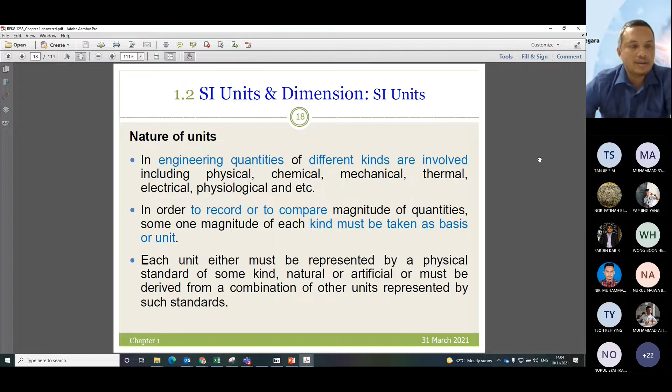In order to record or compare between each magnitude of the quantities, one magnitude needs to be taken as a basis, as a standard for the units. Each unit also must be represented by a physical standard of some kind, natural or artificial, which must be derived from the combination of other units, represented by the standards.

So SI unit stands for Systeme International d'Unites in French. This is from French words, and the abbreviation is adopted by the International Standardizing Organization, which is ISO, and it can be used in many languages.

I think all of you know about the ISO. ISO is a very important standard that needs to be followed by each country in order to have a good standard on the development and design of products.

The SI unit is comprehensive, a logical and coherent system designed for science, engineering, and technology. The SI unit system consists of 28 units, where there are 7 base units, 2 additional units, and 19 derived units. We can see what is the base unit.

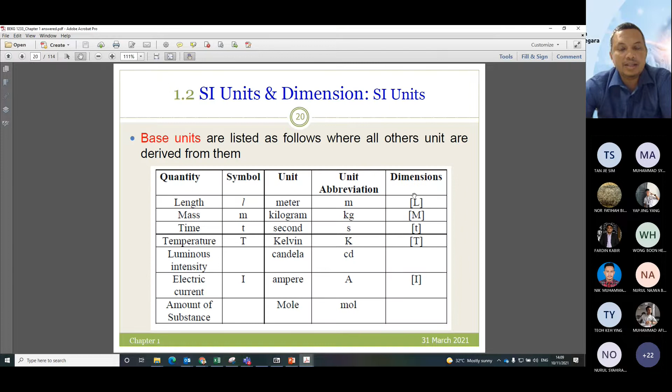So this is the dimension. Dimension is a representative of the symbols. We can see, the dimension is a derived unit which is recognized by the dimension, and can be defined as a complete algebraic formula for the derived unit, in the dimension equation. The dimension equation is the conversion from one system of unit to another.

This can also help in the derivation of equations for physical quantities and checking the accuracy of the equation. For convenience, some derived units have been given new names. For example, force is a combination of kilogram, meter, and time, and we can call the unit of force a Newton - the new name for the dimensionally correct combination of kilogram meter per second squared.

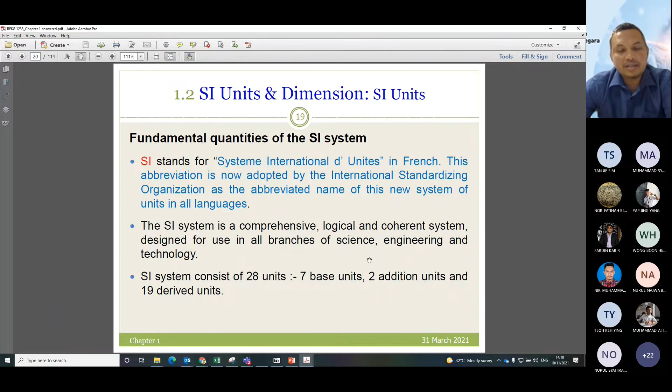Here is an example of how we can derive units from dimensions. For example, velocity is derived from the dimension of length over time, giving us v, which is meter per second. This is called velocity, and this is an example of a derived unit. There are 7 base units and also derived units, like v, which comes from length and time, giving us velocity.

On the other hand, acceleration is velocity over time, giving us small a. For example, F equals ma - force equals mass times acceleration. Mass is a basic unit, and acceleration is a derived unit. When we multiply them, we get force.

Also, work is force times length, and from this we get a Joule. And for power, which is work over time, we get the unit of power. This is the dimensional derivation of units.

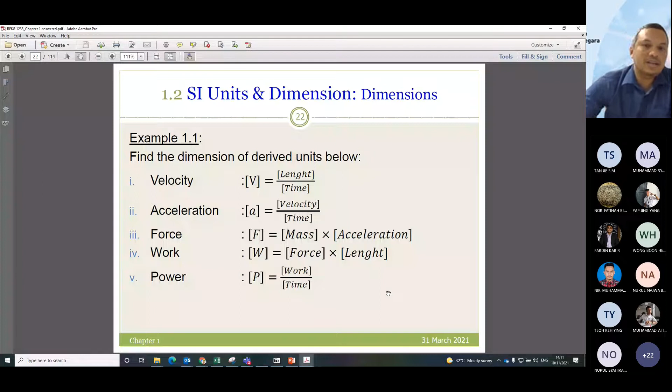From the dimension, we can get the dimension of the derived units. For example, for velocity we get L T minus 1, and we can change this directly into the units - the unit abbreviation for length is m, for time is s, so for velocity it becomes m s minus 1. So we can directly convert it: length is m, t is s, giving us the unit for velocity as m s minus 1.

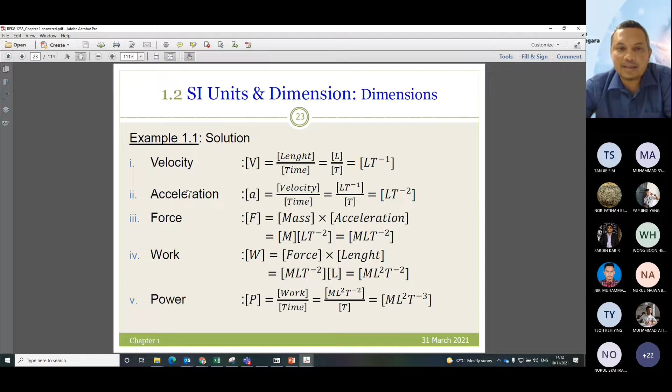For acceleration, we get L T minus 2, which we can change directly. For force, it's M L T minus 2, giving us kilogram meter per second squared. The same applies for work. So first you need to derive the dimension, then change the symbols inside it to get the derived units. This is the example for velocity, acceleration, and others.

As a standard of measurement, measurement is a process of comparison. Regardless of the measurement method, the basis of comparison must be employed using a standardized unit, and the standard must be precisely defined. Where different systems of units exist, the conversion method must also be mutually agreed upon.

The standard of measurement can be defined as a physical representation of a unit of measurement, where the measurement relies on reference to either an artifact or prototype, or natural phenomena, or a standardized procedure using standardized measurement methods and equipment. For example, a unit of mass can be defined as a cubic decimeter of water at the temperature of maximum density, represented by a material standard, where the standard is known as an accurate measure of physical units. This is what we call a standard of measurement.

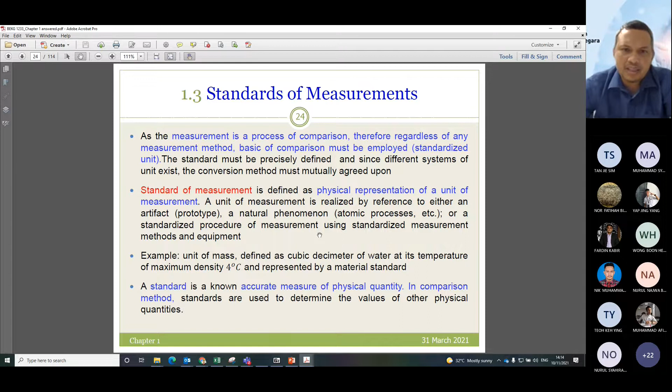We can also define the standard of measurement into four categories: the international standard, the primary standard, the secondary standard, and the working standard.

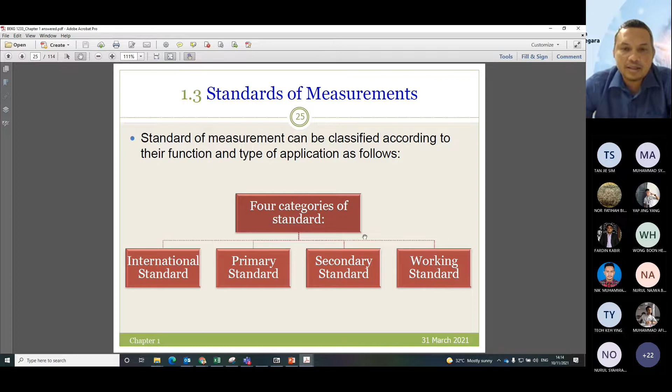Based on these standards, there are some categories. For example, international standards are defined by international agreement, representing certain units of measurement to the closest possible accuracy. These standards are also periodically evaluated and checked by absolute measurement in terms of fundamental units. International standards are maintained by the International Bureau of Weights and Measures in Paris.

So that means overall, in this world, there is only one benchmark maintained to uphold the standards. For example, for weight, the standard is kept in Paris. These standards are also not available to ordinary users.

For purpose of day-to-day comparison and calibration, that means ordinary people or ordinary country cannot compare and calibrate based on day-to-day calibration. It needs to be contacted to the International Bureau of Weights and Measures in Paris, for example, in order to calibrate it.

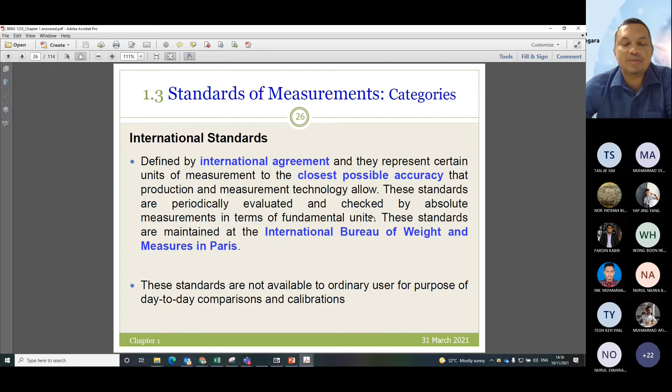So this is the international standard, a very accurate measurement. On the other hand, there is a primary standard. The main function of the primary standard is that it can be verified and calibrate the secondary standard. The secondary standard will refer to the primary standard to make sure the level is accurate, and the primary standard will refer to the international standard to make sure it is accurate with no error.

These are calibrated independently by absolute measurement at each of the national laboratories. That means at national laboratories, for example SIRIM or the Department of Standards, they have the national laboratory that has the absolute measurement that periodically has been calibrated with the international standard. Then the results of such measurements are compared against each other, leading to the world average figure for the primary standard. However, the primary standard is not available for use outside the national laboratory.

For example, in a factory, if you want calibration, you need to submit to the national laboratories to make sure your measurement devices are good to use and highly calibrated. In Malaysia, this function is carried out by SIRIM.

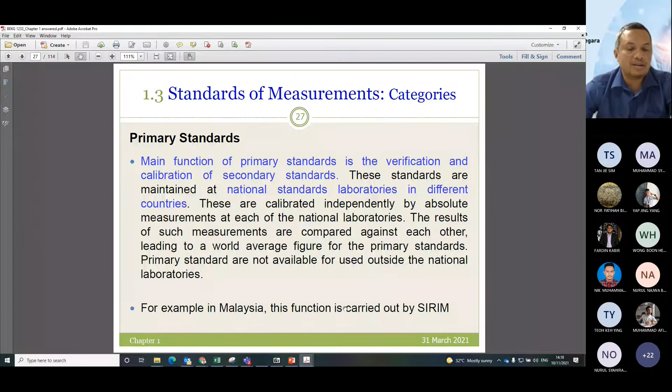The secondary standard is a basic reference standard used by measurement and calibration laboratories in the industry. That means in the industry there is a laboratory to make sure the device is calibrated, and each laboratory periodically sends its secondary standard to the primary standard at national standard laboratories.

Sometimes, for example our weight measures, because we use them every time or daily, the calibration may loosen and then need to be sent to the primary standards laboratory to make sure it's calibrated again and aligned with the primary standard.

After being calibrated, the secondary standard is returned to the industrial laboratory with a certification of measuring accuracy in terms of the primary standard. So after calibration at the primary standard, they will put a sticker showing when it was calibrated and when it expires and needs to be calibrated again. If you want to say a device is good to use, it's the device that has always been calibrated.

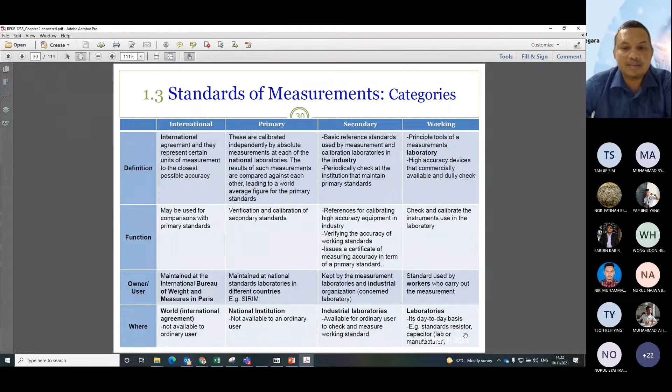Okay, so you can see here about the accuracy. When we talk about the international standard, the accuracy is very, very high, while for the working standards it is very low because it has a lot of levels until the international standard. If we have, for example, between primary standard and the international standard, it's around...

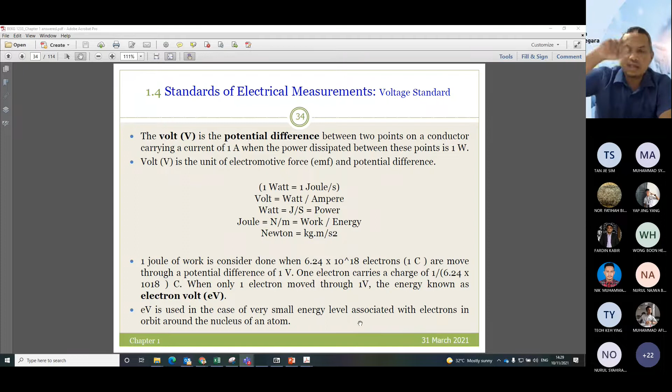And the eV is the very small energy level associated with the electron in orbit around the nucleus of the atom. If you learn about quantum electrodynamics, you can learn about Schrodinger and also the electron orbiting the nucleus.

We also know there is a resistance standard, the ohm, defined as the resistance which permits a current flow of 1 ampere when a potential difference of 1 volt is applied to the resistance. So 1 volt over 1 ampere gives us 1 ohm. This is the derived unit, voltage over current, giving ohm. You can put V over A, but it's better to put ohm, because resistance has ohm as its unit.

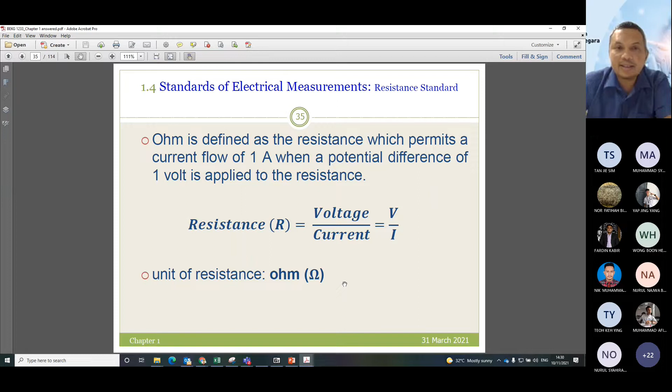For inductance, I think you learn the unit is the Henry. The Henry is when an EMF of 1 volt is induced, meaning the inductance induces this by the current changing at a rate of 1 ampere per second. So if 1 volt is induced at 1 ampere per second, we can call it a Henry.

Meanwhile, the Weber is the magnetic flux, defined as the magnetic flux linking a single turn coil which produces 1 volt when the flux is reduced to zero at a constant rate over 1 second. Then we get the magnetic flux unit, the Weber.

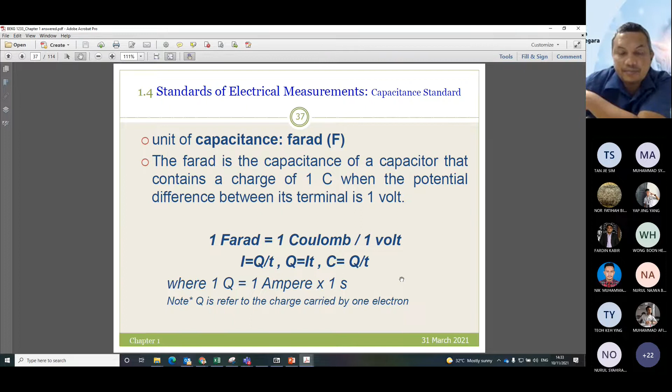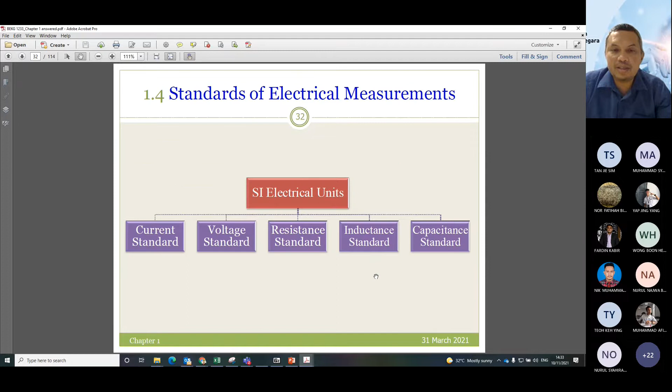Now we go to the next chapter, part 2, about performance characteristics. Last time we learned about electrical measurement, including electrical units and physical units. Now we move on to performance characteristics.

Performance characteristics can be defined into two types: static and dynamic, which also include error and noise. Performance characteristic can be defined as the characteristic that shows the performance of the instrument, for example accuracy, precision, resolution and sensitivity. During the mechatronic system class, you will learn about this, how to select a sensor based on accuracy, precision, resolution and sensitivity.

On the other hand, the importance of performance characteristics is that it allows the user to select the most suitable instrument for a specific measuring job. For example, you need to select the best sensor for your measurement, or the best ruler or tape to measure a distance. You need to select which one is good based on accuracy, precision, resolution, and sensitivity.

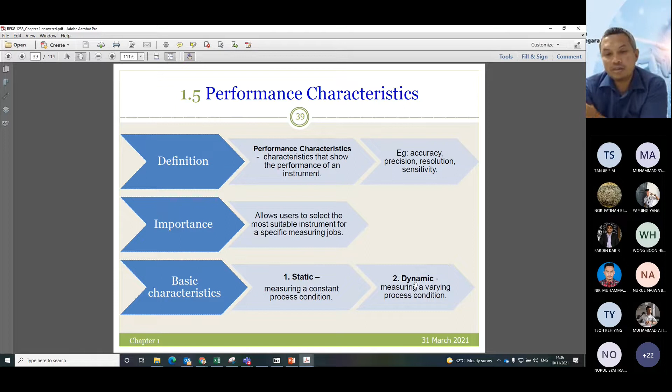The static characteristic can be divided into several types, which are the items that will be discussed: for example, accuracy, precision and resolution, sensitivity, expected value, and also error. This is the characteristic for the static.

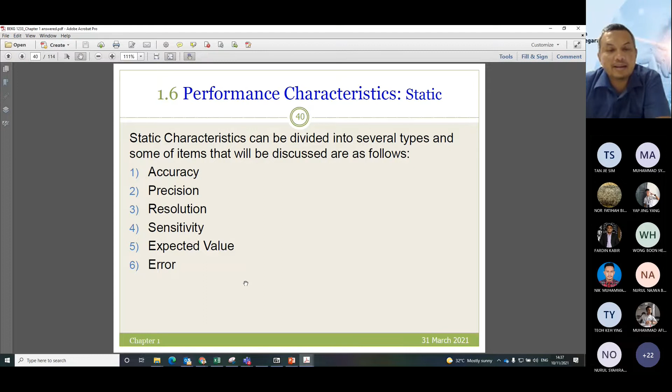For accuracy, it is the degree of exactness, which is the closeness of the measurement compared to the expected desired value. Later we will see the difference between precision and accuracy. So the accuracy is the degree of exactness.

If you want to know what we call high accuracy or low accuracy, or high precision or low precision, you can measure it based on the relative accuracy, where yn minus xn, where yn is the expected value, the center, and xn is the measured value, the real measurement currently measured, and we need to compare whether the accuracy is high or low.

For example, the expected value is the reference value, minus xn, the measured value, over yn. Then we can get 1 minus this, and multiply to get 100%. So if there is an error for the measured value, then it will be calculated and multiplied by 100, so we can get the error times 100.

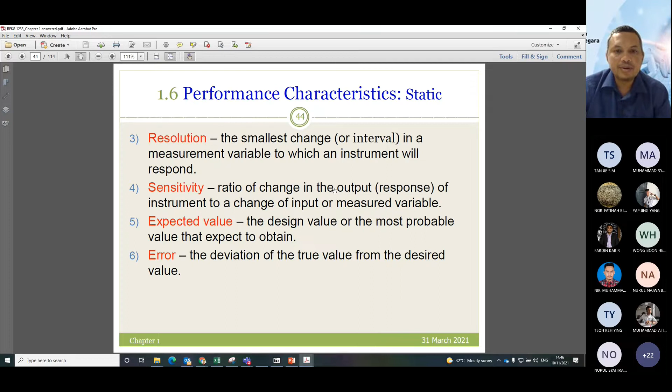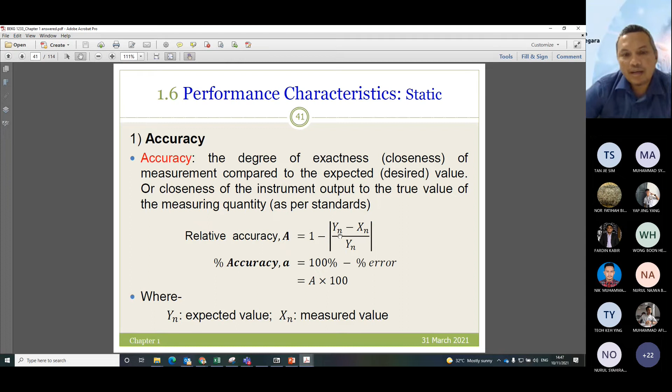And the error is the deviation of the true value from the desired value. So for example, this is the desired value, this is the real value, the true value. What is the error between this and this? You need to minus it, from the true value to the desired value, minus the true value. So we can get: desired value minus the true value, the absolute value.

In terms of error, there are some types of error. There is the error in measurement, and also the gross error, which we can call a human error, and also the systematic error, for example from the device itself, which maybe has not yet been calibrated through the laboratory - that can become a systematic error. And also the random error is an unknown error, where we don't know if it comes from the human or the device itself.

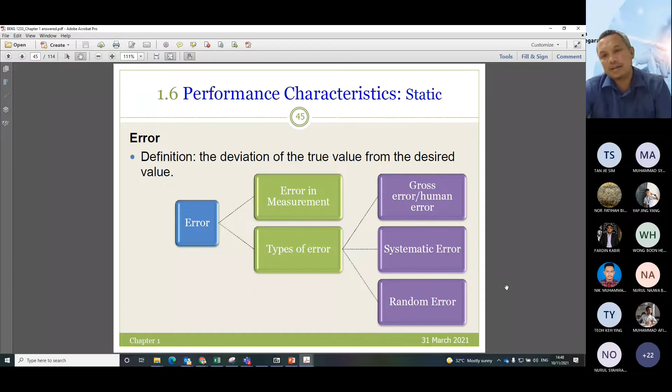For example, it could come from interference. The error in measurement can be generalized: no electronic component or instrument is perfectly accurate. This means that when it comes to electronic components or instruments, they are never perfectly accurate - they all have some error and inaccuracy. So it's very difficult to define the true value.

There is always some difference, either small or large, between the measured value and the true value of the unknown quantity. So the error may be expressed either as an absolute value or as a percentage of error. If you want to find the absolute error, you can just take the expected value or desired value minus the true value or measured value. I think you may confuse the terms true value and measured value, but actually it's the same.

The expected value is the desired value, like we use here, right? The desired value is the expected value. And for the percentage of error, you can take it over the expected value times 100 to get the percentage of error. As for the relative accuracy, when we come to the error, to find the relative accuracy we just take 1 minus the relative error, which gives us the accuracy in percentage. If the percentage is 100%, that is 1 times the percentage of error, like this.

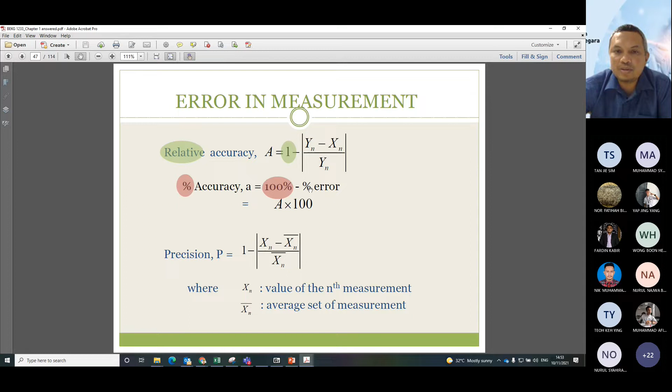This is very simple. For example 1.3, you are given Table 1, which has 10 measured values. The first value measured is 98, second round is 101, third round 102, fourth round 97, fifth 101, until the 10th is 99.

You know it's like an arrow shooting mark, and at the center is 100, but you get around it - sometimes you get 98, 101, and others. As for the precision, if you want to find the precision...

P equal to 1 minus (xn desired minus the average). Xn bar is the average, so that means you need to find the average, because you will use the average at both upper and lower parts. The average of the measurement value is the total of the xn, which is 98 plus 101, 102, 97, etc.

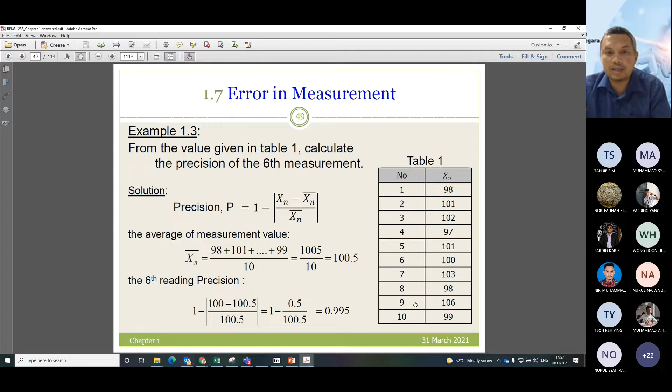So this is for the precision. We already talked about the accuracy, and we already talked about the precision.

Now about the error. The type of error comes from three types: gross or human error, systematic from the device, and also random or unknown error.

From this, we can know that gross error or human error can be caused by human mistakes in reading the instrument, may occur due to incorrect adjustment of the instrument, and computational mistakes. Sometimes we read it improperly.

And the problem cannot be treated mathematically - it needs to be treated by practice, and cannot be eliminated, but it can be minimized, because sometimes it's like parallax.

Okay, so it's one of the human errors. Sometimes when you measure in the laboratory, there is some error - you can say this is from human error, or maybe from the parallax, or maybe from the device itself. There is some reasoning, and how to show that your measurement is not accurate.

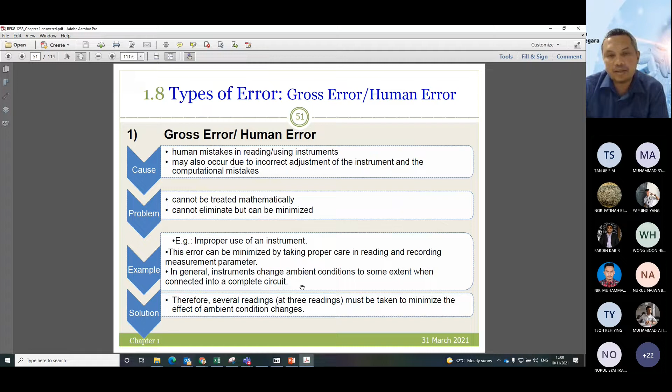The solution therefore is that several readings, at least 3 readings, must be taken to minimize the effect of the ambient condition change. So for example, in order to reduce the human error, we need to take several readings - for example 3 times, 10 times - in order to reduce the repeatability error.

There is also another type of error, for example on reading resistor value using a multimeter. Both multimeters must use proper scale. For example, if you are using an analog multimeter, it's easy to make mistakes, like a parallax error when you are seeing from the left or right, not from the center.

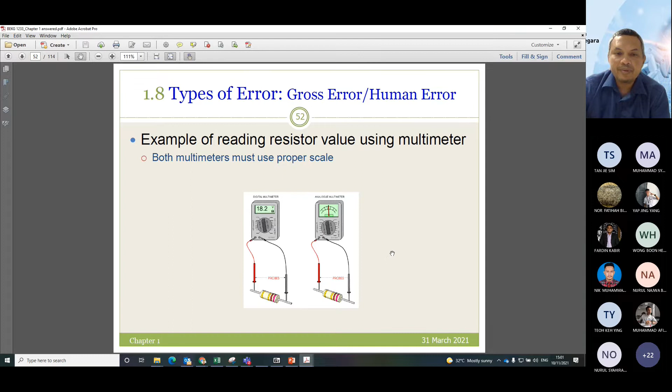And for the systematic error, the technical error is due to the shortcoming of the instrument - for example, due to defective or worn parts, aging device, or effect of the environment on the instrument. For example, you put it in an uncontrolled area, humid - sometimes it will corrode inside the device, therefore it has shortcomings in the instrument itself.

And this error is classified as static and dynamic, where static is caused by the limitation of the measurement device or the physical law governing its behavior, while dynamic is caused by the instrument not responding fast enough to follow the change in the measured value variable.

So this is called the technical error of the device itself, where for dynamic error it's a slow response, for example, and then it has a problem with the error. And for static, it has a limitation on the measuring device. For example, you want to measure a distance of more than 10, but your tape is only 10 - then it's a static technical error, meaning the limitation is on the device itself.

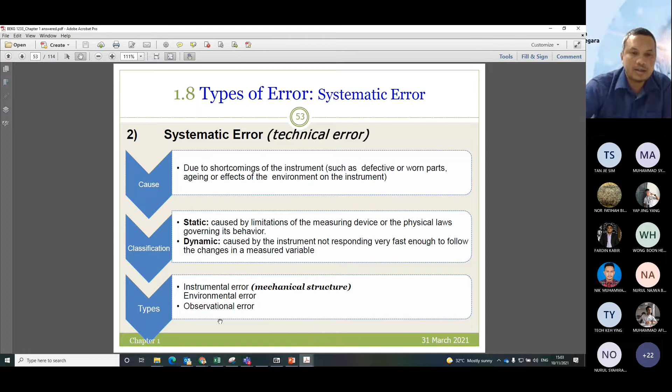For the instrumental error inherent with the measured instrument, because of their mechanical structure, improper calibration or no calibration, or the faulty instrument based on the friction of the bearing - for example, irregular spring tension, also the stretching.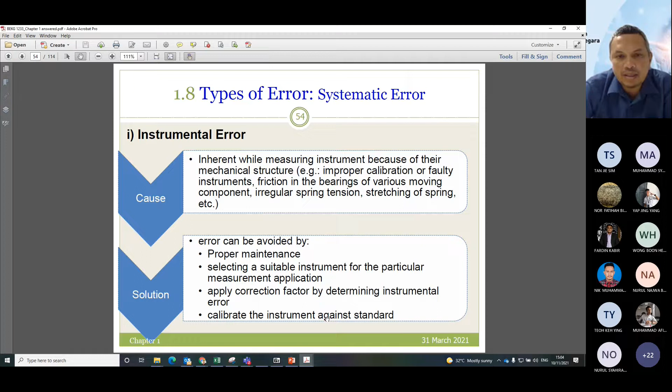And this instrumental error you can avoid by applying maintenance - the sensor or device itself needs to be maintained, and also need to select the suitable instrument for the particular measurement application, and also can apply the correction factor. If you have repeatability but it's close to the targeted value with the same error, we can apply the correction factor, for example times 1.3, trying to make a correction on it, and also calibrate the instrument against standards, because of aging or other reasons.

On the other hand, for the environmental error, this is the external condition - for example the humidity, the temperature, the barometer pressure. Sometimes when we are at normal land level we get a certain temperature accuracy, but when we go to a higher level, because of the pressure and temperature, it changes and is going down.

Okay, then the value changes. This can be avoided by using the air conditioner at that particular area, and also by sealing certain components in the instrument to make sure that it's protected.

For example, take the compass. You need to use a magnetic shield, or you need to calibrate it.

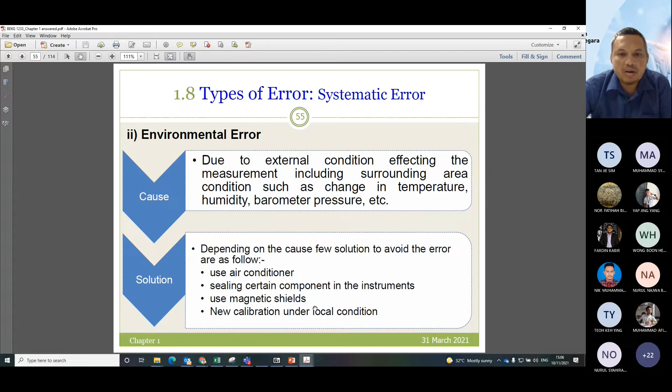For the observational error, it's like parallax error. Other than the systematic error, it can also be a parallax error as a human error. While reading the scale, the observer tends to hold his head too far to the left or right. You need to read the scale at the correct position.

Next is the random error, which is of unknown cause. We don't know where it comes from. Maybe lightning, or maybe noise from outside, electrical interference from the atmosphere.

It occurs when all the systematic error has been accounted for, but it still exists, however it only accumulates in a small effect. It can be avoided by increasing the number of readings, so we can see the repeatability of the reading, and we can use statistical methods to obtain the best approximation of the true value.

As for performance characteristics, we measure it in varying process conditions, since the instrument rarely responds instantaneously. Pure delay is used to describe when the instrument waits for some reaction. Pure delay means because of the slow response of the device, we need to wait a bit for some reaction to take place before we can get the value.

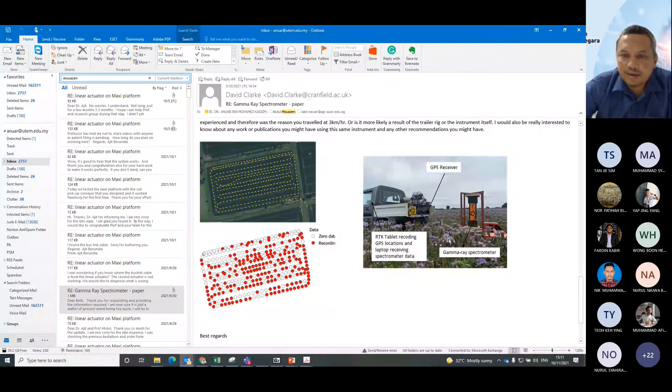Because from our calculation, it needs time to absorb the radionuclide from the soil. Therefore if they go too fast, the gamma ray cannot absorb, cannot record the value of the potassium around it.

That's why I recommended him to go at 3 to 4 kilometers per hour, to make sure everything is absorbed first, then they can go. So that means we need to change the speed of the tractor to make sure everything can be recorded. That's what is called pure delay, when we need to wait for some reaction to take place.

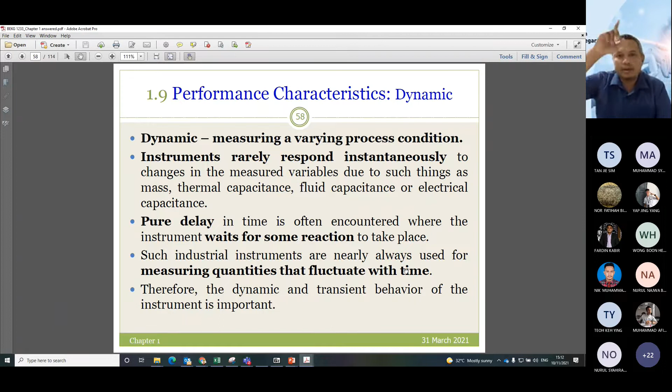On the other hand, such instruments are nearly always used to measure quantities that fluctuate with time. When it comes to fluctuation with time, we need to fit it, as the dynamic behavior of the instrument is determined by the force subjecting its primary element, the sensing element, to some unknown and predetermined variation in the measured quantity.

There are three most common variations in the measured quantity: the step change, the linear change, and the sinusoidal change. What is the step change, linear change, and sinusoidal change?

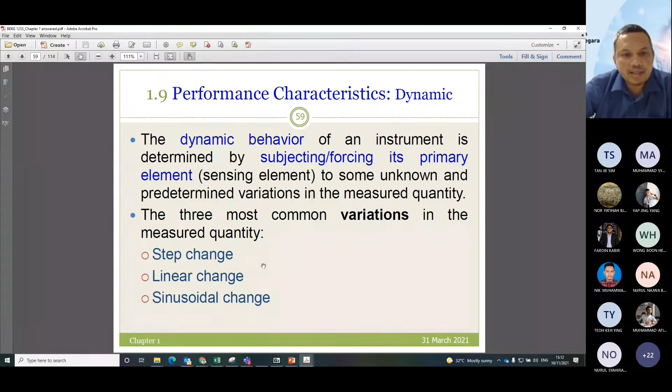When it comes to dynamics, the step change is like a step. It occurs as a rapid change from one level to another level, from 0 to 1, rapidly, without any gradual transition.

The linear change is a change that happens linearly and gradually with time. Then we call it a linear change. But sometimes it's irregular change, and we call it a non-linear change.

For the sinusoidal change, if we look at the time and the change is dynamic, we call it a sine wave. This is the magnitude of its change as a sinusoidal function of a constant amplitude, meaning the amplitude is constant. But sometimes the amplitude is not fixed, then we call it non-linear.

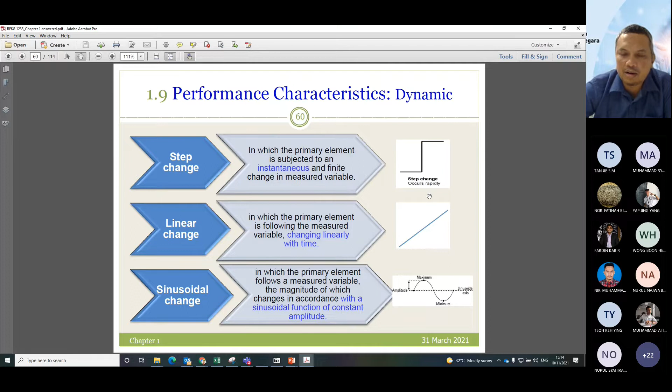This is the characteristic for the three types of change. Let me give you another example of a non-linear change, for example, sometimes it's hyperbolic or saturated.

From this dynamic change, the dynamic characteristics of an instrument are based on the speed of response, the dynamic error, the lag, and also the fidelity. The speed of response is the rapidity with which the instrument responds to change in the measured quantity.

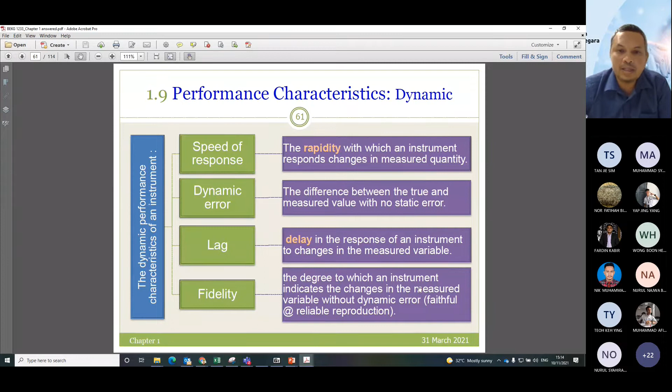The dynamic error is the difference between the true and the measured value, with no static error. The lag is a delay in the response of the instrument to change in the measured variable. The fidelity is the degree to which an instrument indicates the change in the measured variable without dynamic error.

So we finish the performance characteristics, and now the statistical analysis. Statistical analysis separates, as far as possible, the truth from the error, narrowing and defining the region of doubt.

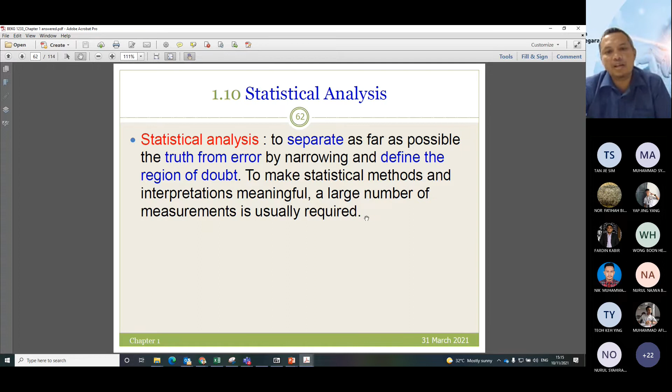We use the statistical method, and the interpretation based on a large number of measurements is usually required. Some of you may already have learned about engineering mathematics and statistics.

Here is the simple statistical method. For example, the mean deviation, the average deviation, and also the standard deviation are defined.

The arithmetic mean is the sum of a set of n numbers, which is like an average. Mean is average, and the deviation is the difference between the average and the test data.

The average deviation is the absolute value of the deviation over n, for the set of numbers. The standard deviation is the degree; it is the root square of the average deviation squared.

Here is the exercise. Table 2 shows the data from the capacitor measurement, which is calculated. The mean average equals xn, which equals x1 plus x2 until xn.

If there is a question on this, from number 1 to number 10, like this: the average value of xn is the total number over 10, then we can get the average. With the deviation, we take each value minus the average to get d1. But for the deviation, don't forget, not only d1 - you have to find d1, d2, d3, d4 until d10.

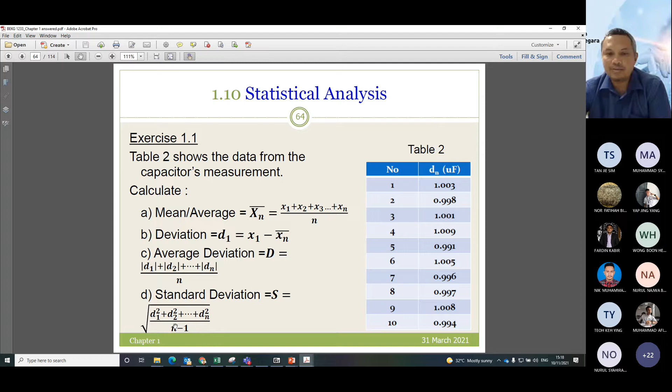So, as for the limiting error, the limiting error is the accuracy of the measuring instrument when it's guaranteed within a certain percentage of a full scale reading.

For example, if the manufacturer specifies the instrument to be accurate at plus minus 2% for full deflection, suppose the accuracy of a 0 to 100 voltmeter is specified as 2% for full scale. That means the error is guaranteed to be 2 volts for any reading. If the voltmeter reads 50 volts, the error is 2 volts, so 2 over 50 times 100 gives a 4% error.

This value is called the limiting error. If it's 2 over 100, we get 2%. But now it's 2 over 50 volts, so we get 4%, because the reading here is 50, not 100.

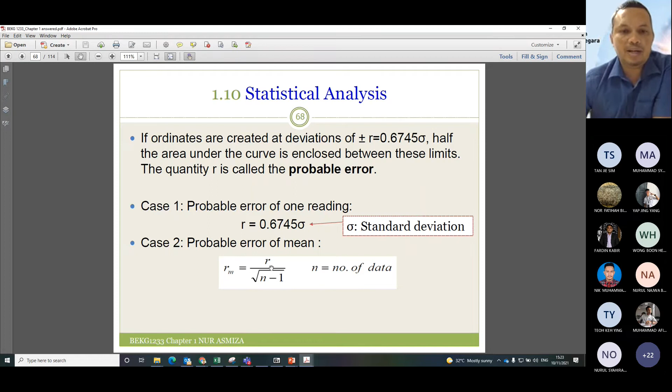So if the deviation is equal to 0.6745 sigma, half of the area under the curve is enclosed, and this quantity R is called the probable error, for the standard deviation sigma. Then we can find Rm equal to R over root n minus 1.

Now, how about the summation of error? How do we sum the error when there are two or more quantities, each with its own error, and how do we combine them in an equation? The combination can normally be done by addition, subtraction, multiplication, and division operations.

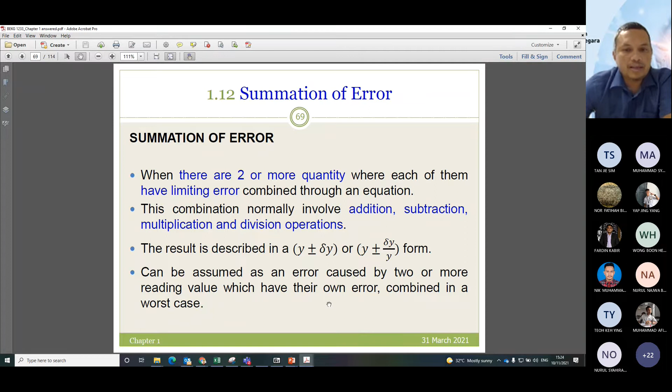For example, if a device has an error like y plus minus dy, or dy over y form, we assume the error is caused by two or more readings, each with its own error, combined in the worst case. For example, if you want to sum the error for A plus B, both instruments have errors.

Both instruments have errors, like delta A and delta B, which are the absolute errors of A and B, and percent A and percent B are the limiting errors. So the value and error for A and B can be written as A equal to A plus delta A, or in terms of limiting error, A plus percentage A, for example 2%.

Similarly for B, the error can be written as B plus delta B, or equal to B plus percentage B. Either way you can use it, depending on the question, whether they use delta or percent.

Any mathematical operation that uses A and B will produce a summation error. Based on these two devices, we can get the combination of the mathematical operation. For example, A plus B, we get delta C equal to plus minus delta A plus delta B. For A minus B, we still get delta C equal to plus minus delta A plus delta B.

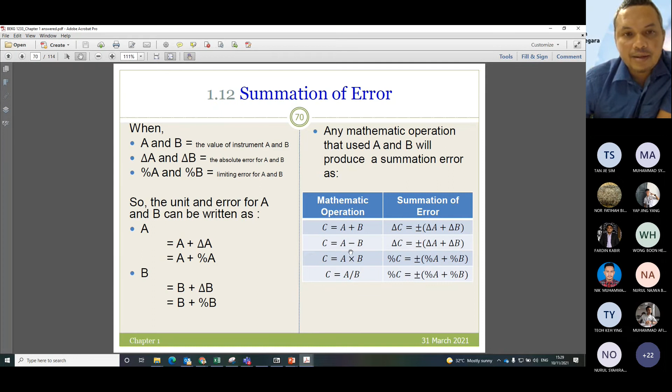The limiting error is the percent A and B. So we know there is a voltmeter and an ammeter. Now the same as the previous calculation: for the voltmeter, you know the voltmeter is 150 volt, and the ammeter is 100 milliampere.

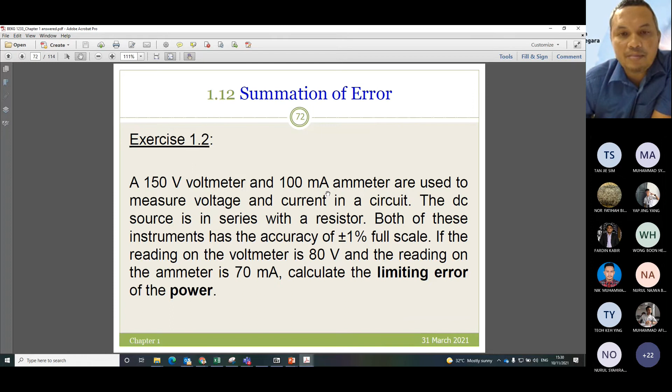If the accuracy is 1% for both, then the limiting error for the instrument is 1% times 150, which is 1.5 volt. For the ammeter it is 1 milliampere, because 1% times 100 milliampere equals 1 milliampere.

For the limiting error measurement percentage, you need to find 1.5 volt over 80, because the reading has already changed; the reading is now 80 volt. For the ammeter it is 70 milliampere. So 1.5 over 80, since 80 is given, and 1 milliampere over 70 milliampere, times 100, gives 1.429%, and this one is 1.875%.

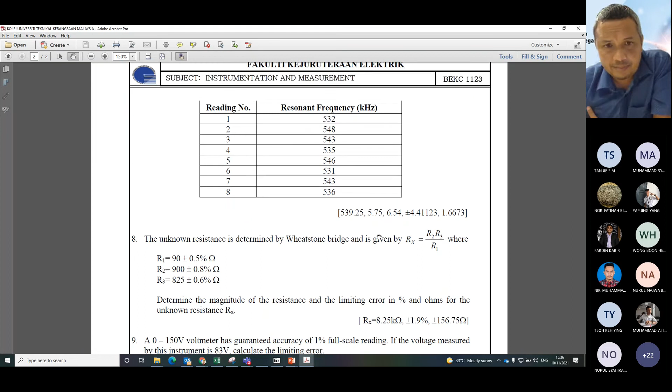Alright, I think until here there are some tutorials. For example, tutorial 1, there are some questions that have been discussed, for the absolute error and for the statistical and false measurement. I hope you can do this.